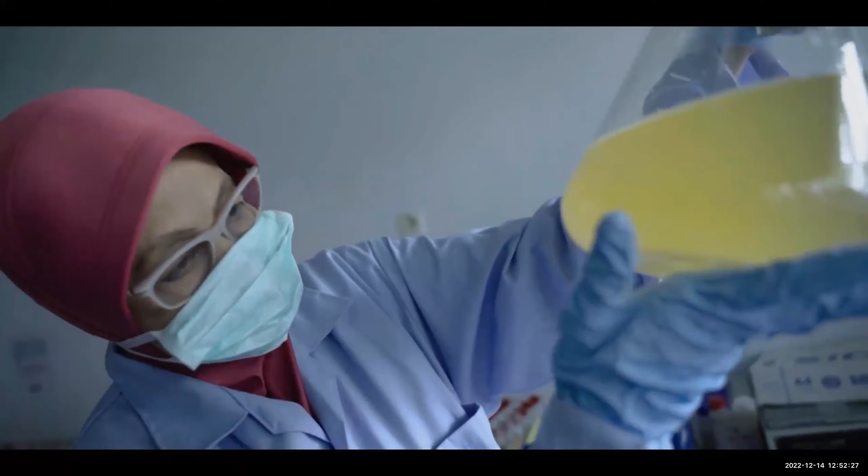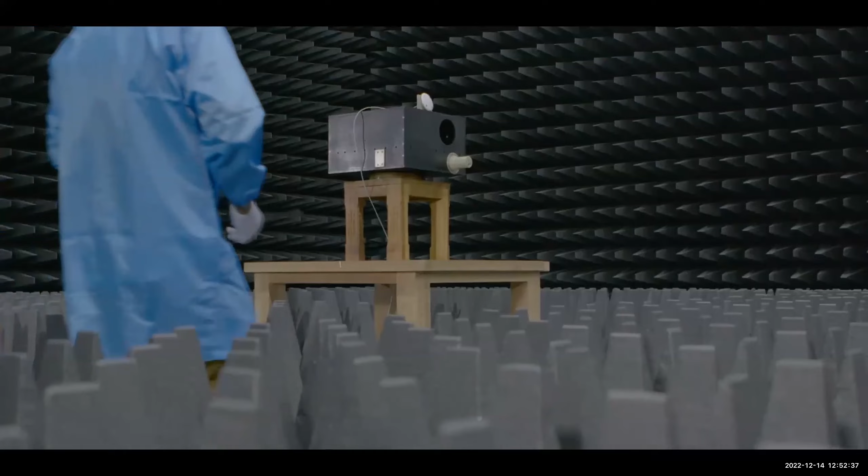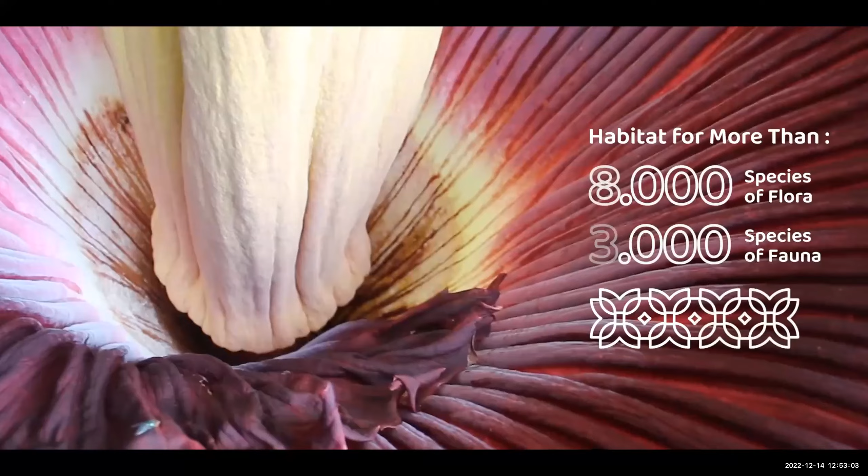Research is our strength to overcome any limitations. Innovation is the guiding vision that drives us towards the future. We cannot face this alone. We must stand together to make our vision a reality. Growing strong upon the land of Nusantara, a magical place filled with miracle and wonder. A land spanning 2 continents and 2 oceans, rich in culture and biodiversity. We and Indonesia are the necessary combination to realize the grand visions of the future.

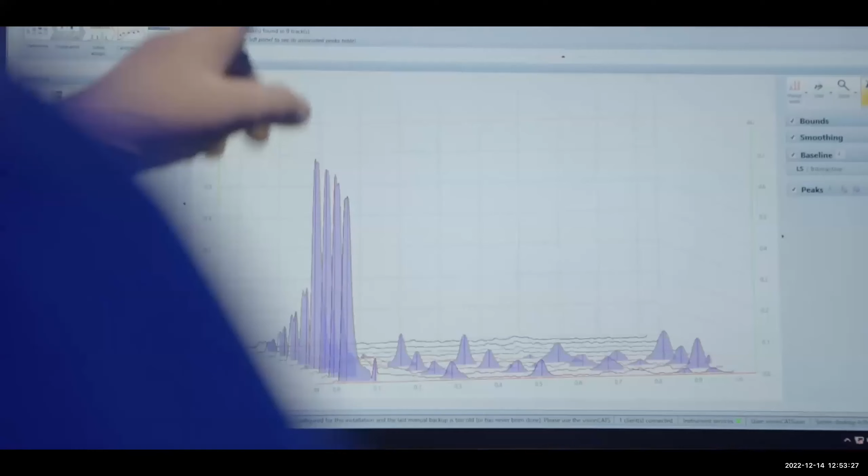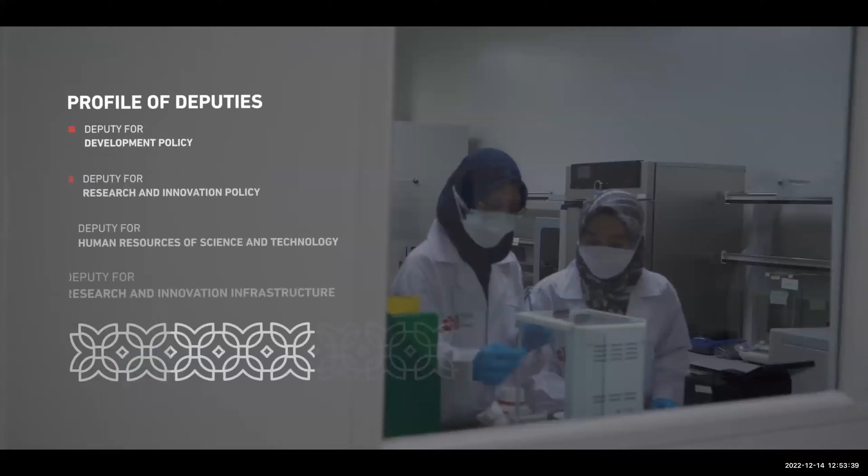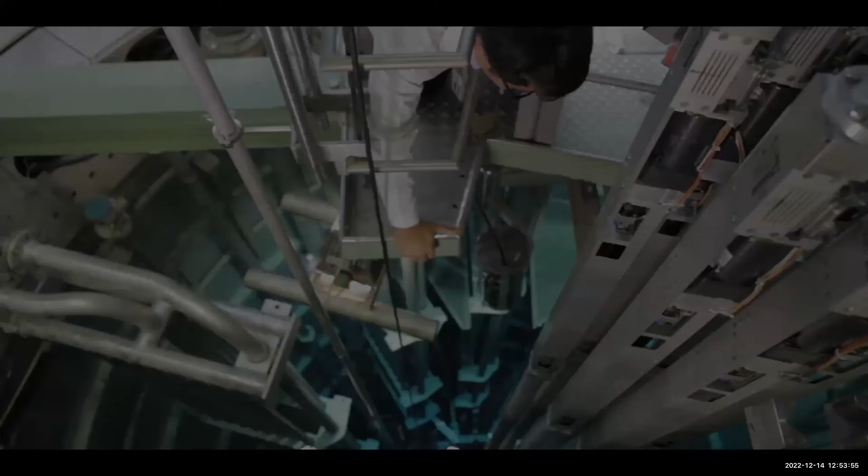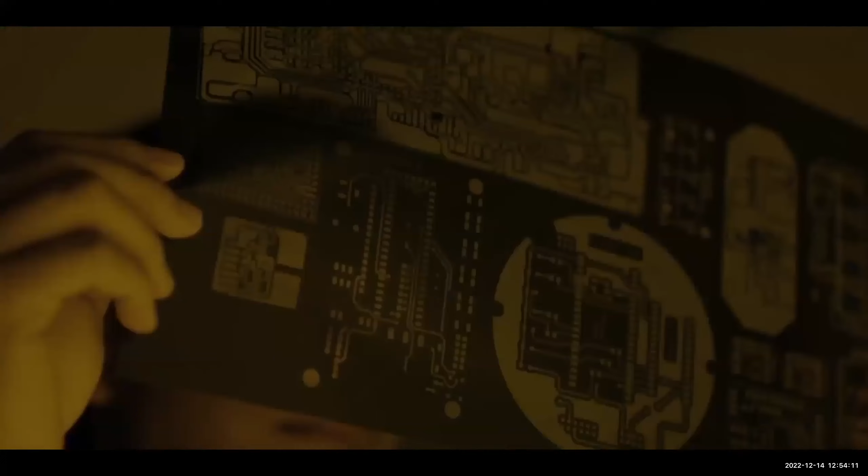Like an orchestra, BRIN harmonizes research, development, assessment, application, and also synergizes invention and innovation in Indonesia. We created an ecosystem consisting of 7 deputies, 12 research organizations, and 85 research centers dispersed throughout Indonesia. Research Organization for Aeronautics and Space, Research Organization for Nuclear Energy, Research Organization for Energy and Manufacture, Research Organization for Earth Sciences and Maritime, Research Organization for Life Sciences and Environment, Research Organization for Electronics and Informatics,

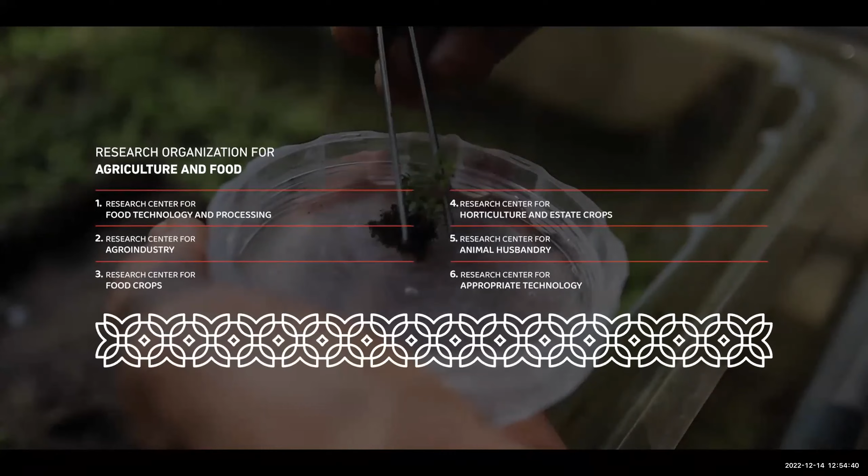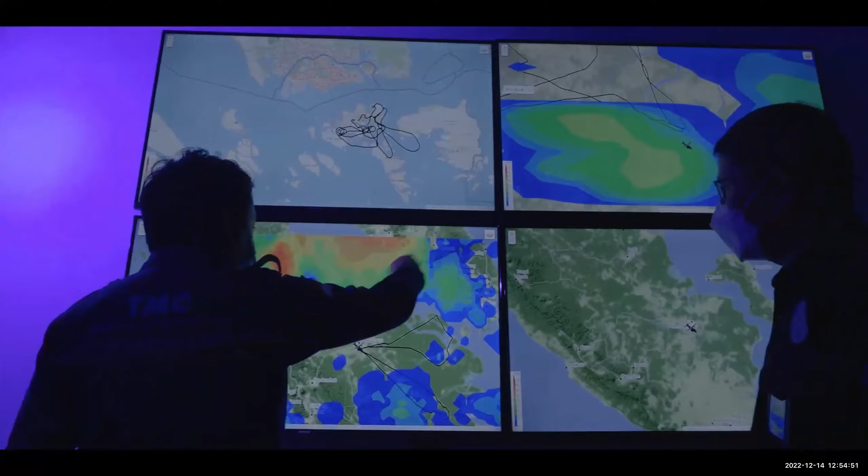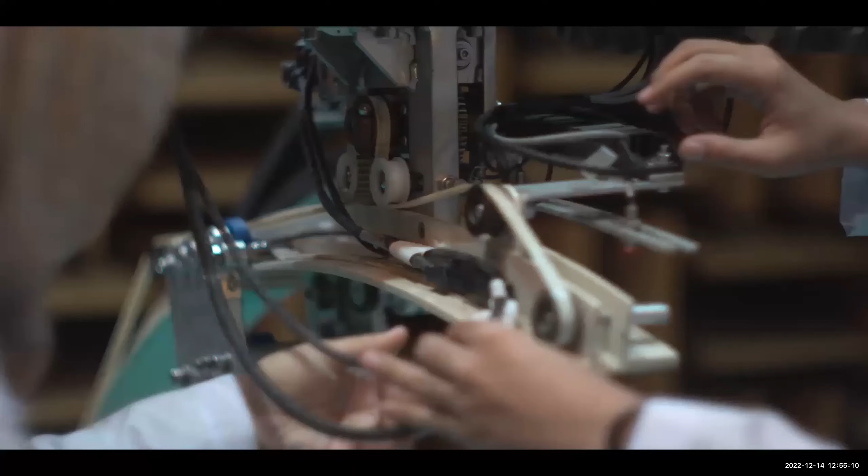Research Organization for Social Sciences and Humanities, Research Organization for Archaeology, Language, and Literature, Research Organization for Health, Research Organization for Nanotechnology and Material, Research Organization for Agriculture and Food, Research Organization for Governance, Economy, and Community Welfare. BRIN catalyzing research and innovation to develop an advanced scientific ecosystem in Indonesia with two main targets. BRIN realizes the tremendous potential of the nation's youth in the field of science and technology. Thus, various research and innovation policies are being formulated to develop and cultivate human resources with high competence and aptitude in science and technology. Creating many excellent programs is a form of BRIN's commitment to researchers, innovators, and the general population from various disciplines across the nation.

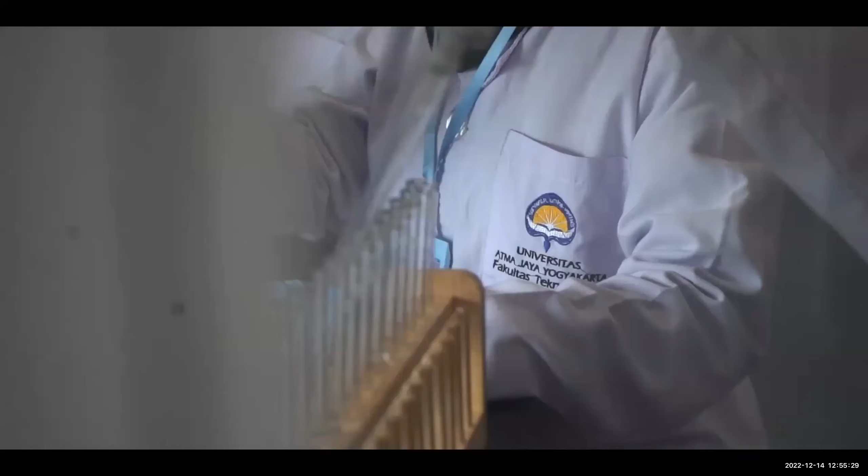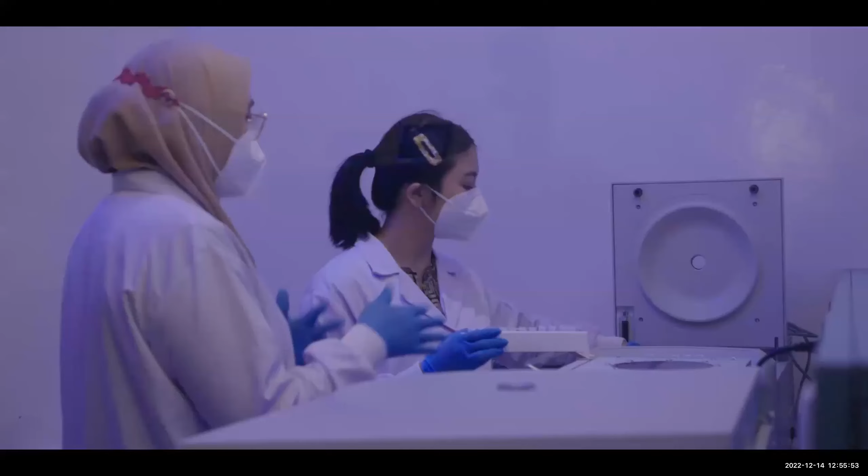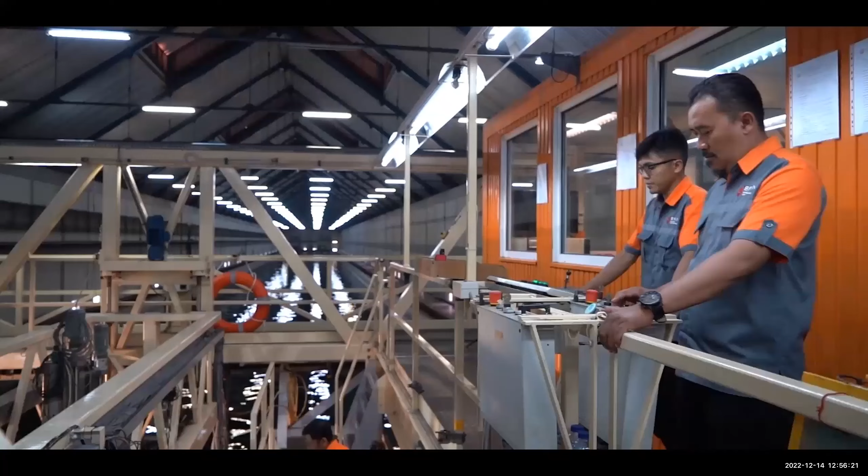The research and innovation ecosystem quality improvement in Indonesia is also realized through the collaboration of various ministries, institutions, domestic industries, and regional governments, to name a few, by forming the Regional Research and Innovation Agency, or BRIDA. Moreover, cooperation with various foreign research institutions continues to be developed through active participation as a member of various organizations and international forums. BRIN organizes research into a more effective and efficient process by integrating human resources, infrastructure, and budget from various research and development institutions.

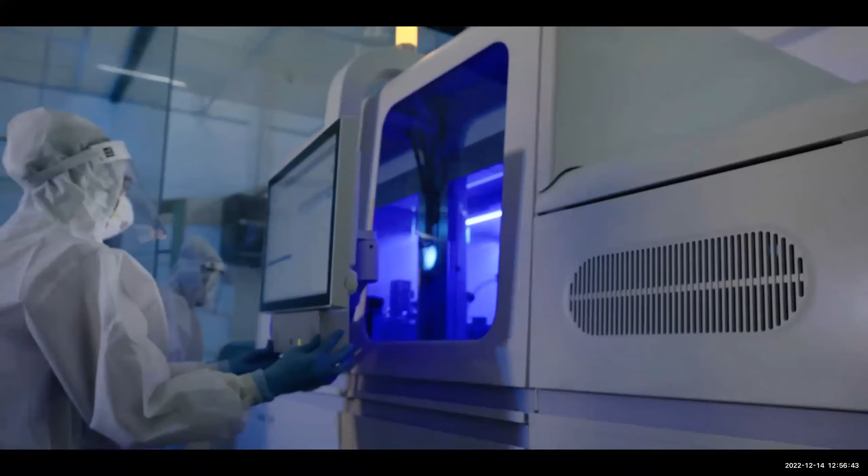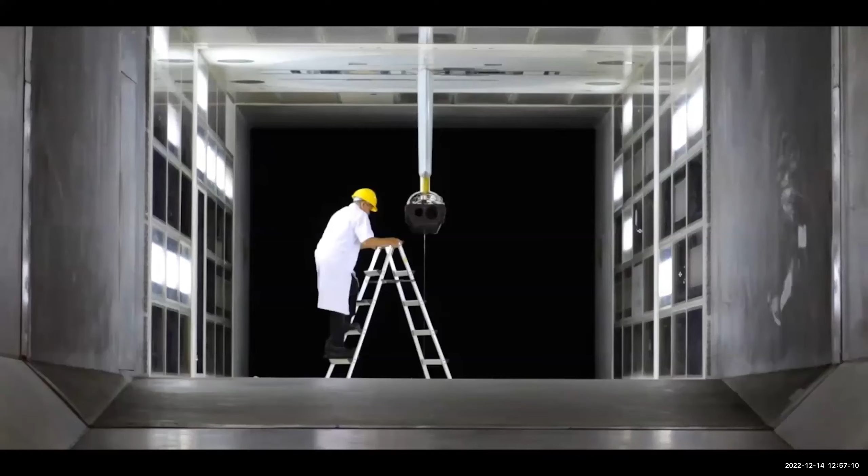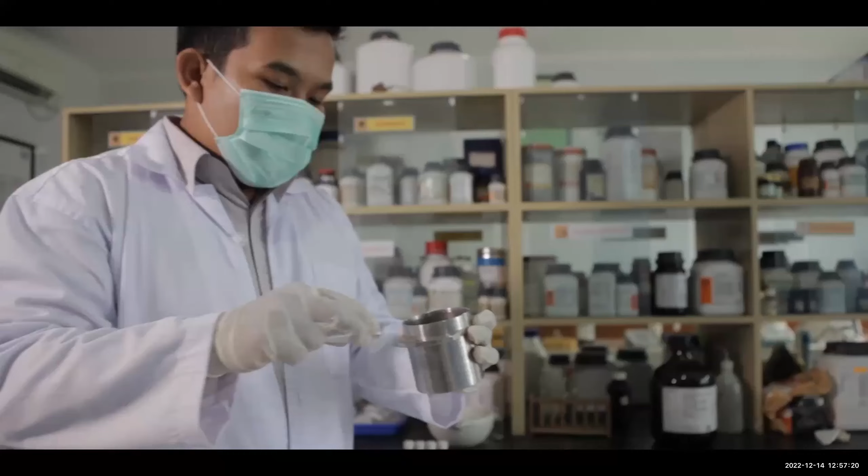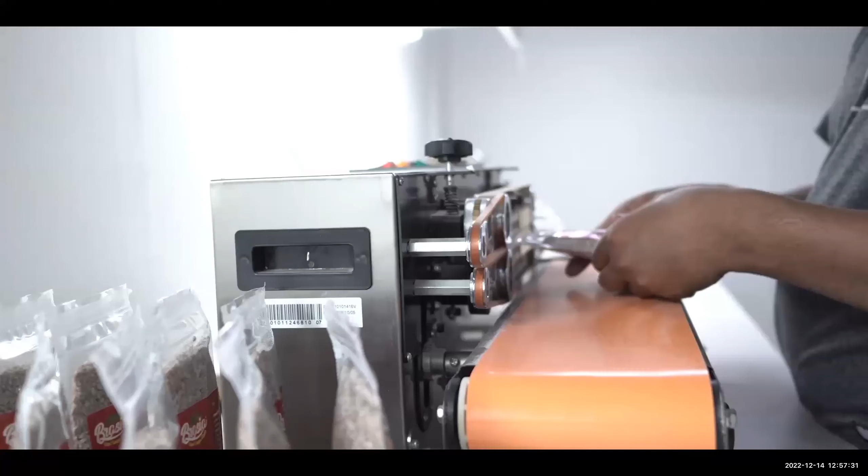Oriented by a national research priority, BRIN routinely enacts comprehensive evaluations from various research and development institutions. This effort is supported through the continued management and improvement of various research and innovation facilities located across 17 regions of Indonesia, dedicated towards the development of science and technology. BRIN continues to improve our contribution to research and innovation towards national development by developing and revitalizing 4 areas of science and technology, or KST. An integrated area consisting of research laboratory facilities, testing laboratories, and industrial facilities for both startups and SMEs, tenant office rooms, co-working space, meeting rooms, gallery rooms, and other supporting facilities.

BRIN is here to manifest the future of a golden Indonesia 2045 by consolidating science and technology resources and creating a research ecosystem and research-based economical foundation. Transforming Indonesia as a global reference in the development and application of science and technology practices for the good of humankind. Nature is the source of inspiration. Knowledge is the foundation, and to be put in praxis for the sake of the nation.

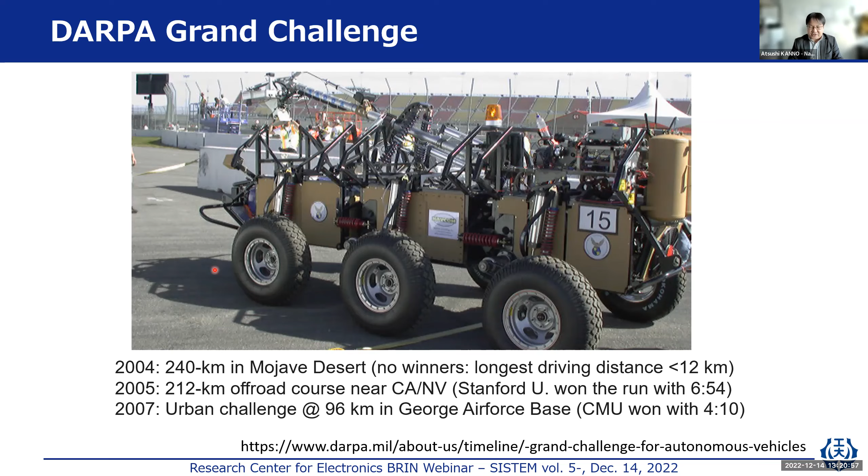So of course, as you know, autonomous driving has many stages to realize complete autonomous driving with the SAE regulated level 5. So actually, at this time, Volkswagen, BMW, Toyota, Subaru have completely finished level 3 autonomous driving. Level 3 means the vehicle conducts some part of the driving without driver's engagement, with monitoring of driver engagement. That means it's half realized by autonomous driving in specific conditions. I think Tesla US is one of the front runners to realize this autonomous driving.

But even for Tesla, level 4 autonomous driving is not achieved yet. Level 4 is that the vehicle can drive and monitor the driving environment themselves, but certain environmental limitations exist. That means Tesla's autopilot technology can drive highways autonomously, but in the dense urban area, it is a little bit difficult at this time.

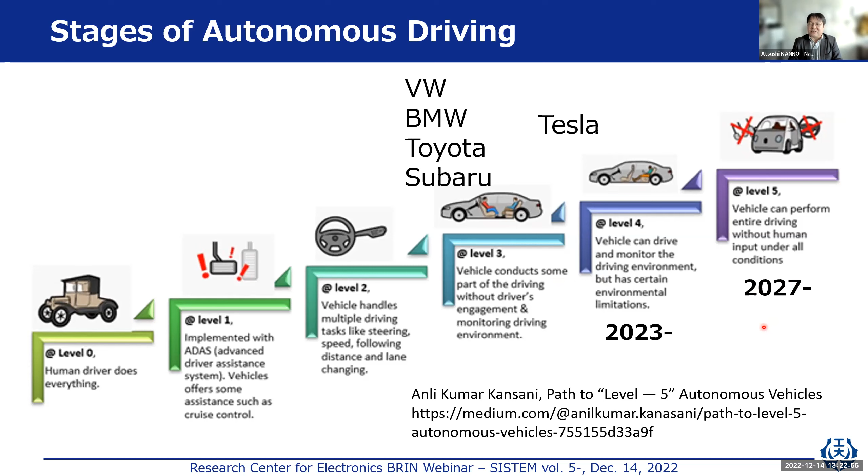So in Japan, in 2023, Toyota, Subaru, Nissan, Honda will try to realize level 4 driving in real urban situations. This is in the Yokohama area. Now the Japanese government is discussing level 5 autonomous driving after 2027 with the legal issues.

So to realize this autonomous driving, the automotive communication system, that means the in-vehicle communication system, is very important because many sensors, cameras, radars, LIDARs should be connected to the in-vehicle networks. This is the current technologies. We have many technologies even in this era.

The LIN communication system is a one-wire connection bus topology connected to the powered mirror, powered seat, and the heaters. Of course, LIN has a very small data rate, less than 20 kbps. The CAN bus is configured with a two-wire communication system. It is commonly used for automotive technology and other solutions such as smart factories. CAN is very commonly used in this area. In the automotive system, the CAN is connected.

CAN is used in the anti-skid braking systems, the powertrain control, engine control, something like that. But typically, CAN bus has a capacity of about 1 megabps. Even the newly developed CAN FD bus system is limited to 8 megabps, 8 megabits per second.

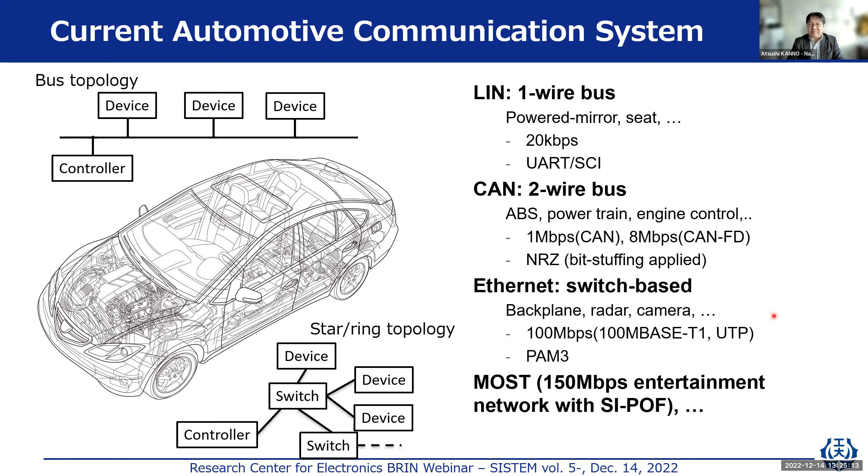Now this Ethernet technology is delivered from the home and the data center technology to the automotive technology. But one automotive Ethernet system is just 100 megabps, so-called 100BASE-T1 technology with the unshielded twisted pair. That's a two-wire system. But for autonomous driving, the capacity of the communication technology is insufficient to realize the many sensor recipients.

But in the automotive network, we have many issues. One of the big issues is that the automotive system requires a high operational temperature range. Almost all the devices should operate with the temperature range from minus 40 degrees to 105 degrees. This is a very tough condition.

Of course, eye safety is very important because the engineers in the car factory cannot wear laser goggles or something like that. So the lasers in the automotive system should be less than 1 milliwatt. And of course, the autonomous vehicle communication controller should turn off the laser if the connector is disconnected. This is a very important feature.

And of course, the lifetime of the devices is also important. At least 30,000 hours of operation lifetime is indispensable because this corresponds to a 20-year lifetime and 4 hours of operation per day every year.

And moreover, the aluminum content of the devices should be reduced because the aluminum should be affected by this type of hard and tough condition. So almost all the devices, the lasers and the other CMOS or silicon technology, should remove the aluminum content in the semiconductor systems.

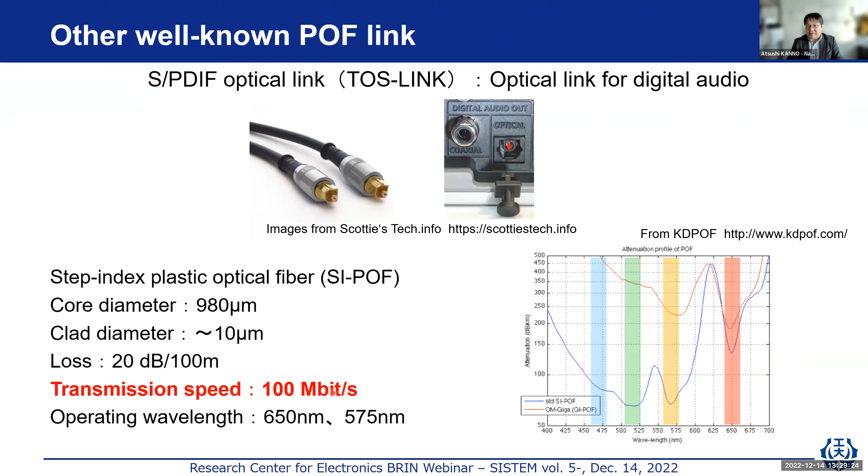But of course, it is a very large core fiber, and it has large loss and large interference of the optical signal at the receiver end. So this S/PDIF or MOST technology is limited to a transmission speed of up to 100 megabps. But this plastic optical fiber technology can be used for network technology in industrial situations.

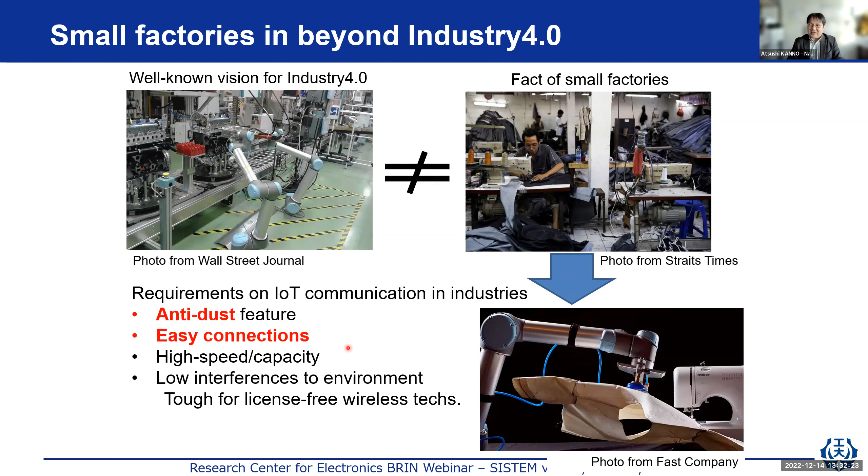So the size of much of the dust is greater than 10 microns. So if we just connect and disconnect in dusty conditions, we cannot communicate in single mode optical fiber due to the insertion of the dust or something like that. So we have to increase the core diameter to install in small factories, to realize a smart factory in small handmade factories.

As I mentioned, the step index plastic optical fiber has a very large core diameter of 1 millimeter, but the communication speed is limited to less than 100 megabps. So we can use the 50 micron core diameter multimode fibers, so-called GI50 or OM3, OM4. This type of optical fiber is already commonly used in data centers for 10 gigabps or 20 gigabps links. So we can easily use these 50 micron core diameter optical fibers.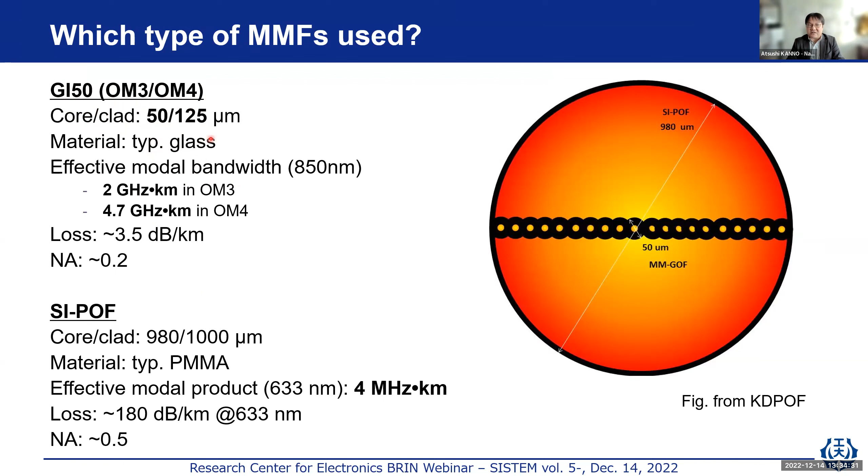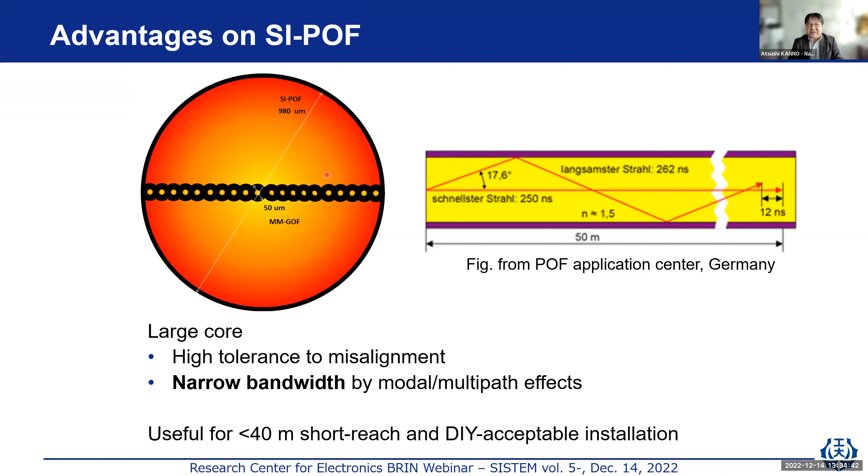But as I mentioned, the step index plastic optical fiber has the great advantage of a large core, but narrow bandwidth. At that time, a Spanish company provided a 1 gigabps link with step index plastic optical fiber with LED and photodiodes. This technology was designed and produced for automotive Ethernet in the car, and it is already standardized in IEEE 802.3bv, gigabit Ethernet for plastic optical fiber.

But KDPOF is a Spanish company, and the professional said this is a limit. 1 gigabit is just the limit for step index plastic optical fiber. For higher capacity in-vehicle networks, we have to use optical fiber with a narrower core diameter.

Actually, the next generation of automotive Ethernet should be configured with a zonal network. Today it is just a bus topology communication system, with devices or ECUs or something like that. But in the near future, we have to switch from bus topology to ring or star topologies with zonal gateways based on Ethernet systems.

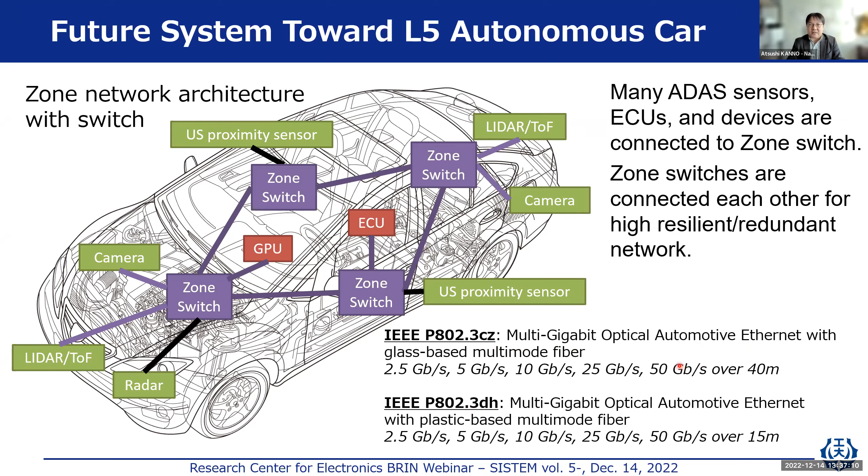This type of Ethernet technology is now being discussed in IEEE 802.3cz, or 802.3dh, multi-gigabit optical automotive Ethernet systems. To realize multi-gigabit throughput, we have to use 50 micrometer core optical fiber, so-called multimode optical fibers, with 40 meter transmission capability with 4 inline connectors. This is a requirement from the car manufacturers.

The target throughput of this standardization is 2.5 gigabit, 5 gigabit, 10, 25, and finally 50 gigabps. But is 50 gigabps indispensable or not? I think 50 gigabits per second is good enough capacity at this time. But in the next generation, meaning the coming 5 years, 50 gigabps is not enough to connect to the new generation sensors.

Just as an example, the required capacity of the camera for advanced driver assistance systems. The resolution is 4K with 30 or 60 frames per second. For 4K at 60 frames per second, the full color camera provides 12 gigabps. If we use a stereo camera with 4K, of course the capacity will be doubled, to around 20 gigabps. If we use an anti-collision avoidance camera system with front camera, rear camera, side cameras, it requires 60 gigabps or 80 gigabps.

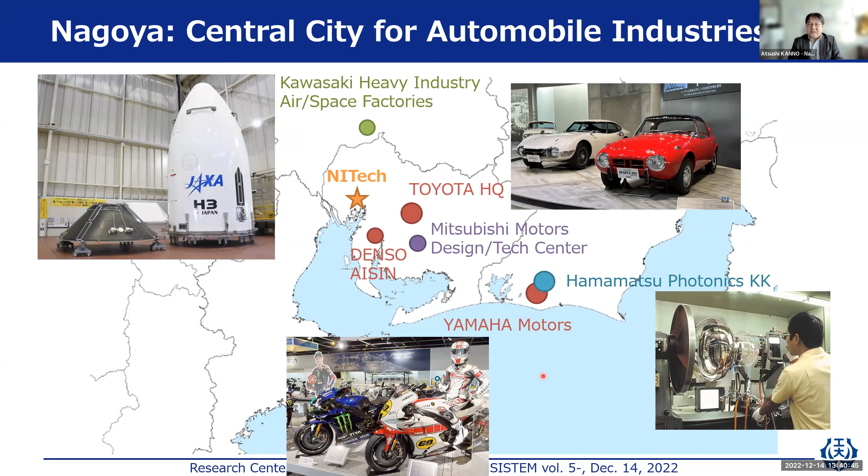Okay, so the mission of the Center for Future Communication Research is to develop automotive technology in automotive optical Ethernet and electrical Ethernet systems. Here, we provide a test house to realize the closed and open strategy to deliver commercialization and standardization to the international market, in collaboration with automotive vendors and the automotive industries.

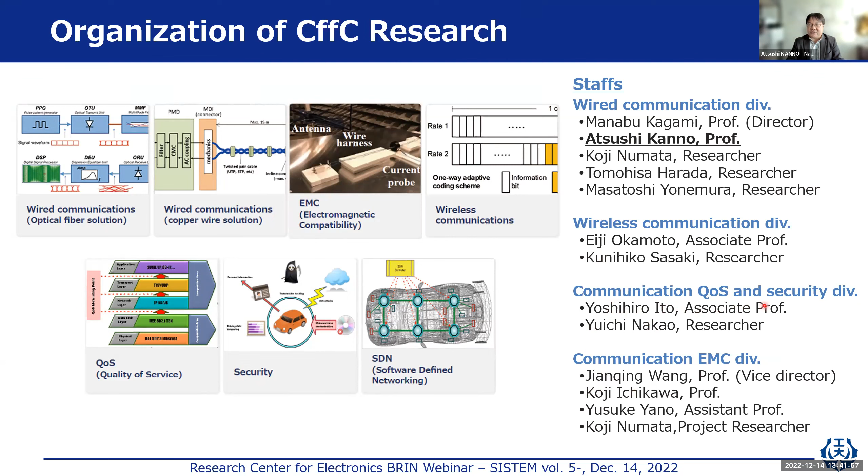So we have 7 divisions in this research center: wired communication in optical fiber solution, wired communication in 2-wire copper wire solution, electromagnetic compatibility, wireless communications, quality of service based on software-defined network or time-sensitive network, and car security and software-defined networks. So we have many staff at this time: the EMC, communication QoS and security division, the wireless communication division, and the wired communication divisions.

Okay, so this is an example of our test facilities. We have a radio anechoic chamber for EMC or EMI tests of the harness in the car or something like that. And the optical technology test set and optical technology equipment, and layer 2 or layer 3 QoS or TSN test sets are already prepared. Next year, we will open the facilities to the industries and to the commercial markets.

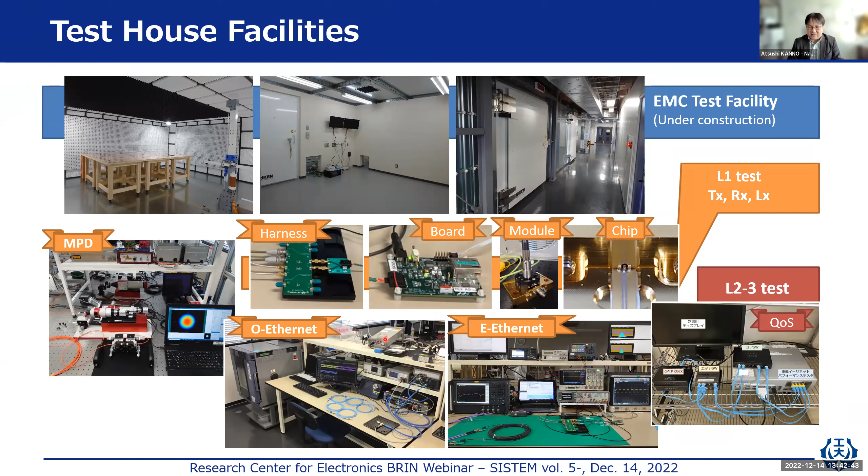Okay, this is an example of our R&D in the optical domain. We use MIMO technology derived from 5G and 6G mobile technology in multimode fiber to realize high capacity and high speed automotive Ethernet technologies. This is 3x3 MIMO technology to realize 10 Gbps, 20 Gbps, and 50 Gbps systems.

The other technology is the radio relay link inside the vehicle. The millimeter wave signal, a 5G mobile signal, cannot penetrate inside the car because the car is shielded by metal plate. So it's not so easy to deliver the signal to the glove box or the passenger seat or something like that. In that case, radio over fiber or a millimeter wave radio relay link system is a promising solution to deliver the 5G or 6G signal from outside to inside the car.

This is a collaboration with Yazaki Corporation, a very big harness manufacturer. I think Yazaki Corporation is one of the biggest harness companies in automotive systems.

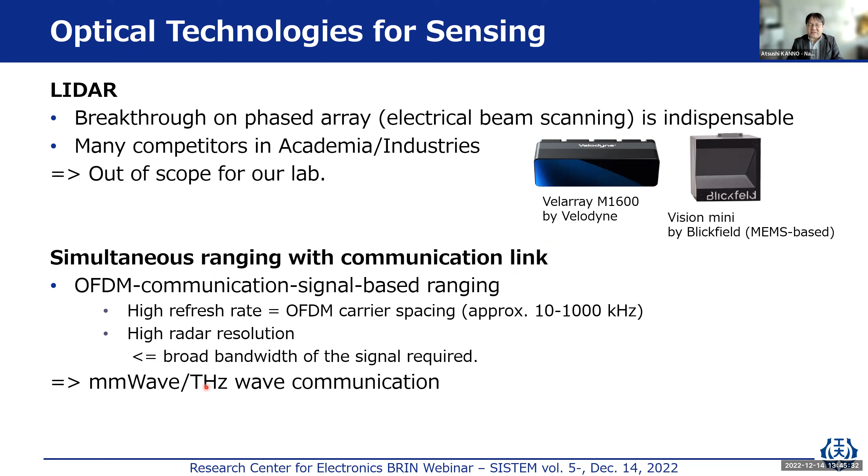So actually, for our Center for Future Communication Research and our Kanno laboratory, LiDAR is out of scope. But we have to develop part of the LiDAR technology: simultaneous ranging with the communication link in millimeter wave, terahertz, or optical systems.

So we can easily communicate. We can easily connect the millimeter wave communication system with the optical fiber technologies, so-called radio over fiber. So radio over fiber is a promising solution for high frequency radio signal generation and detection, to directly capture and directly receive to the optical fiber systems.

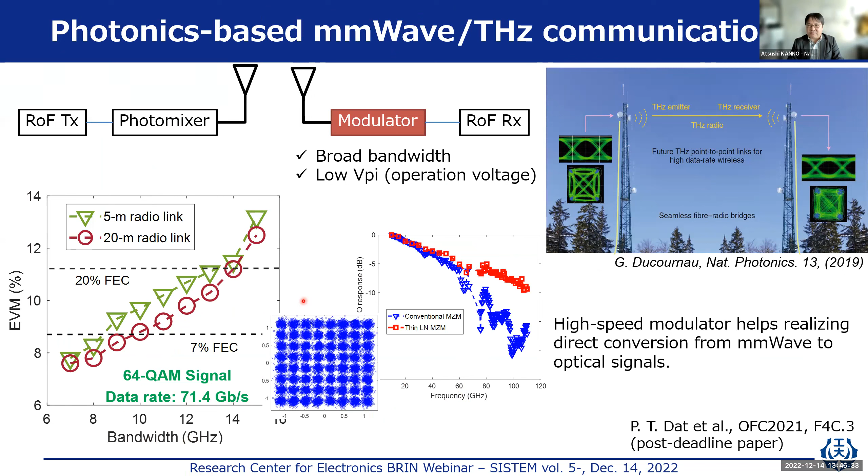So actually, this is one of the results from our NICT work. The millimeter wave and terahertz system can be tested by the radio over fiber equipment with 71.4 gigabps in 90 gigahertz or 100 gigahertz. That is a promising solution for the 6G or 7G mobile communication systems.

And the application of this millimeter wave technology or terahertz technology connected to the optical fiber technology is the fixed wireless system in network. The fixed wireless system is a promising solution to connect the access network without optical fibers. Actually, in Indonesia, Malaysia, Thailand, of course in Japan, in some areas we cannot deploy the optical fiber due to the cost issue or geographical issues.

So in that case, we have to use the microwave communication link as fixed links. But the microwave link has a very small capacity, less than 100 megabps. So many guys are focusing on the millimeter wave fixed wireless access systems to deliver 10 gigabps or 20 gigabps links in radio communication systems.

But in the millimeter wave, the signal is affected by the weather conditions. Of course, the millimeter wave signal is largely attenuated by the rain or large humidity, and some poles hold the radio equipment. If strong wind hits the pole, the pole vibrates, so the received signal is very small.

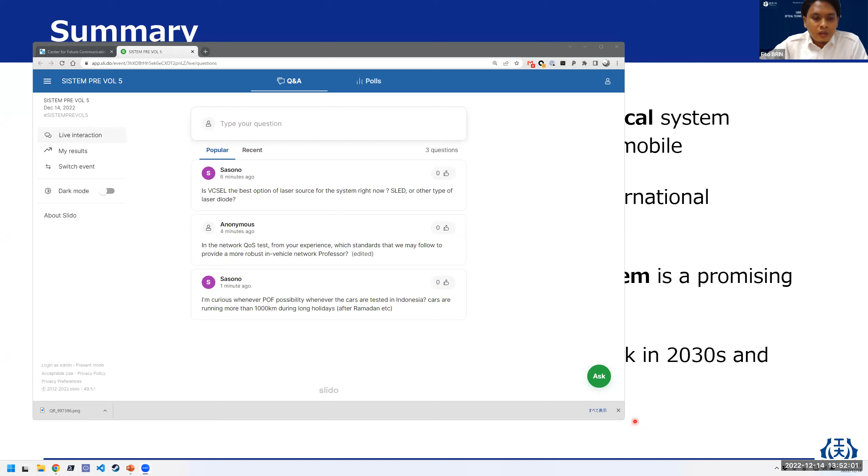For the first question: is VCSEL the best option of laser source for the system right now?

SLED or other type of laser diode? This is. Yeah, thank you very much. So actually, at this time, the VCSEL, the vertical cavity surface emitting laser system, is a promising solution, because even in this automotive Ethernet system, we have to reduce the energy consumption.

But the SLED is, of course, one of the solutions, but if the SLED has a high modulation bandwidth, I think this is a good solution to realize the automotive systems.

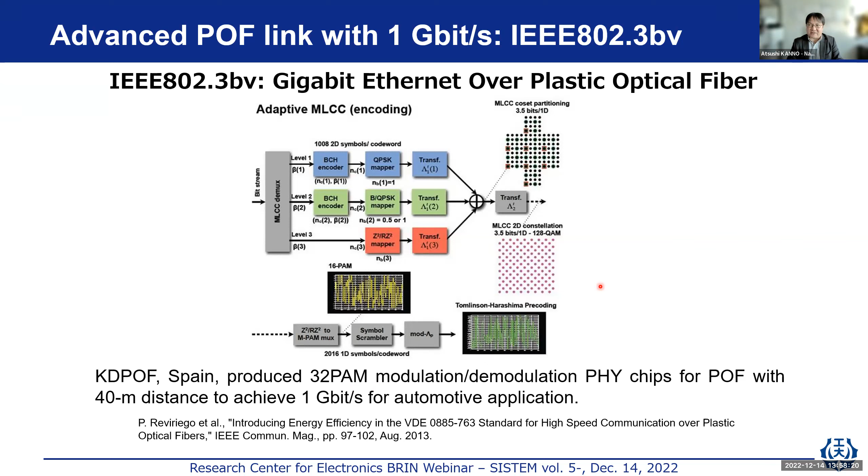But if we use a VCSEL, we can increase the capacity via the plastic optical fiber. But of course, I think less than 10 Gbps will be the limit to deliver the signal via the plastic optical fiber. Okay, thank you, Sensei.

Okay, for the next question from Sasono-san. I'm curious about the plastic optical fiber possibility when cars are tested in Indonesia. Cars are running more than 1,000 kilometers during long holidays. Yeah.

Actually, plastic optical fiber has already been tested with a 30,000 hour test with heat shock or something like that. I think plastic optical fiber is already tested with some systems, and some cars in Indonesia have plastic optical fiber-based infotainment systems. But I'm sorry, I'm not sure which cars are imported to Indonesia or developed in Indonesia.

Okay. But I think the 1,000 kilometers, I mean, it is in a tropical area. 1,000 kilometers or more running, without stopping. And what about the thermal condition? I wonder actually if the POF will be melted.

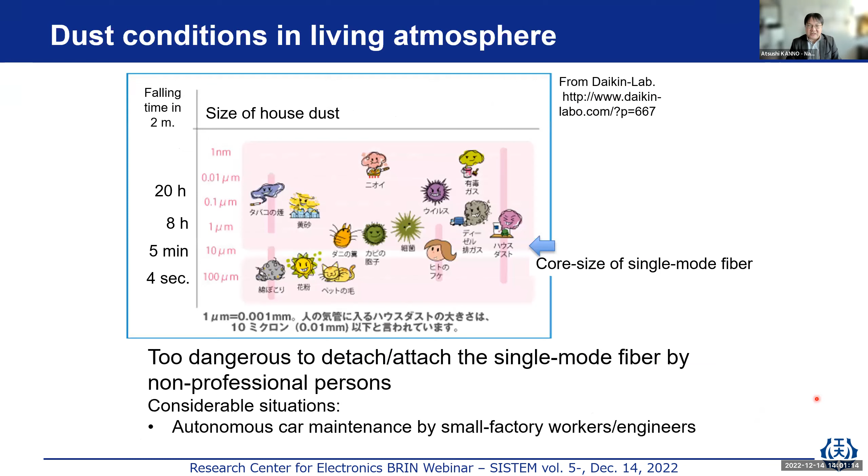But actually at this time, plastic optical fiber is just not a major solution for next generation automotive Ethernet. As I mentioned, 802.3cz is a glass-based multimode fiber to be installed with 2.5 gigabit or multi-gigabit systems. I think glass-based optical fiber has good advantages in a 200 degree high temperature condition or something like that.

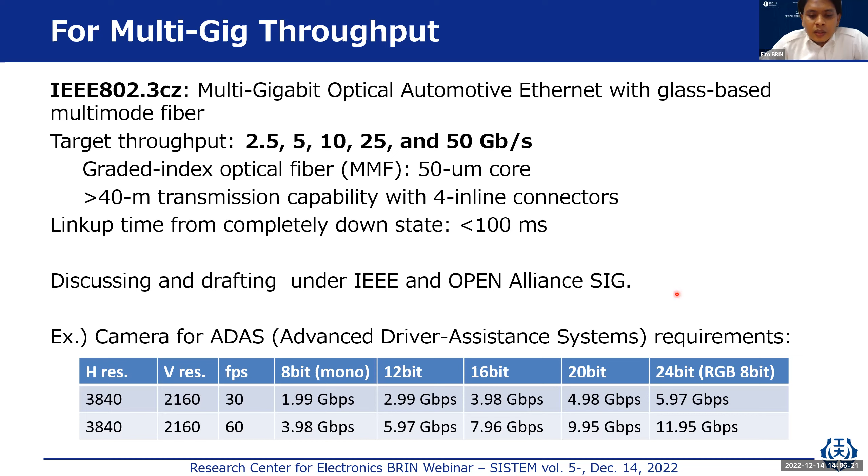Okay, we have the next question from the question link, please. This one. Just a moment. From Mr. Marlin: any possibilities or experiences with electrical to optical and optical to electrical converters in the biomedical field, such as diagnostics or detection? Yes, thank you very much.

So actually NICT has some projects on biomedical sensing technology based on optical fiber communication systems. One solution, collaborated with Chiang Mai University and Khon Kaen University in Thailand, is where NICT provided an antigen and antibody sensing chip in optical systems. In this system, laser technology is very important, and wavelength sweeper technology based on the EO modulator is very useful to realize high-speed scanning of the antigen-antibody silicon photonic chip.

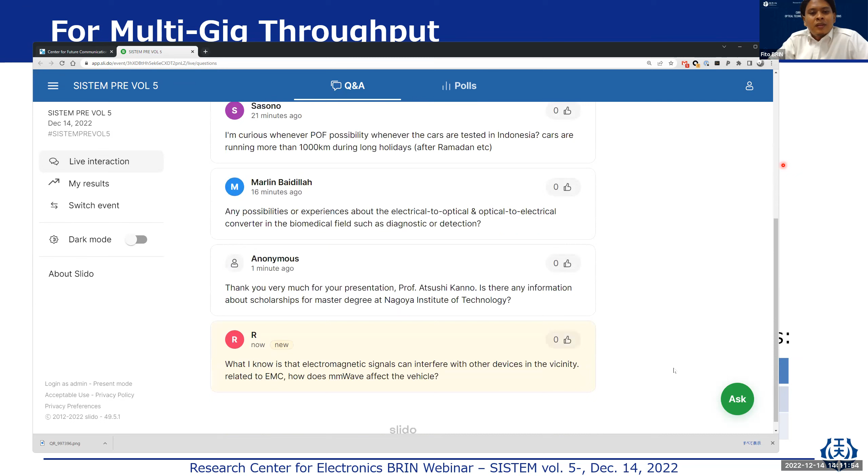Thank you very much for your presentation, Professor Atsushi Kanno. Is there any information about scholarships for a master's degree at NITech? Yeah, I'm sorry, I have no information for the master's degrees. But we have some scholarships.

Of course, Nagoya Tech is not a big university, because Nagoya Tech is just focusing on being an Institute of Technology. So the number of students and staff is very small. In total, less than 6,000, including bachelor, master, and doctoral students. So in that case, the total budget of the university is also small.

So I think we have some kind of scholarship, but I'm not sure if it is focused on the master course or the PhD course. So I will check later. Thank you very much. Okay, maybe in the future we can make a collaboration and send young researchers to NITech.

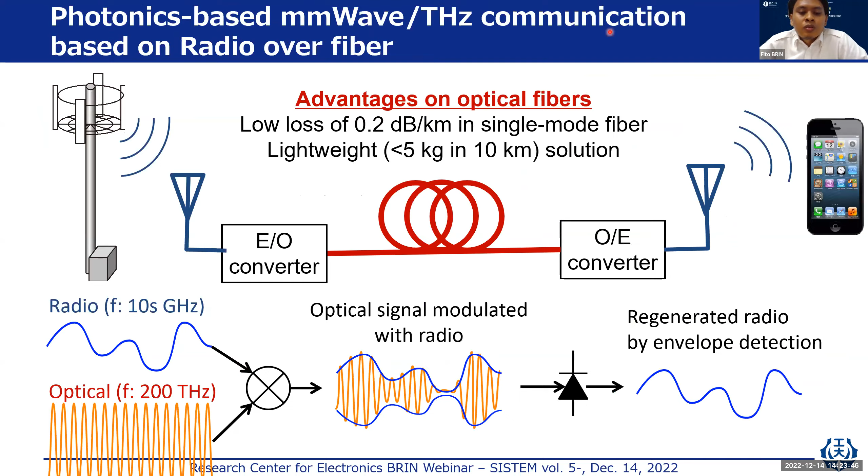In this webinar, Kanno Sensei introduced the current technology and R&D for in-vehicle network, especially the related technology for V2X, V2I, and V2V, and sensors based on optical and radio systems. High speed, robustness, and resilience in ICT systems are highly demanded to develop economic, science, and technology sustainably worldwide. So in the coming 2030, we will have 6G mobile and level 5 autonomous vehicle systems to connect all the devices and systems for cyber physical system based big data analysis.

However, to support safety in autonomous vehicles, the current 100 Mbps, even the advanced 1 gigabit per second in-vehicle network, is insufficient to receive the signal from high-resolution sensors such as LIDAR and cameras, so broadband in-vehicle networks are required. Therefore, high-capacity in-vehicle networks are now being developed in academia and industries.